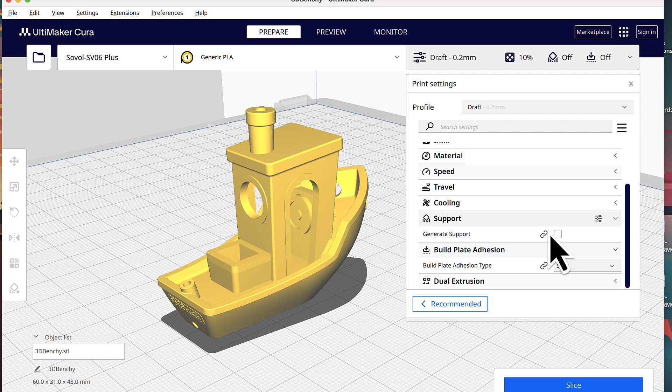But we want to take a look at the build plate adhesion. By default it's set at skirt, and for most things that's all you'll need. That or brim. Brim is good for adding additional adhesion and making sure nothing tilts over if it's not as rigid as having a flat base, or maybe multiple tubes come up just like the stack here that then connect to a piece that hover. A brim would be excellent.

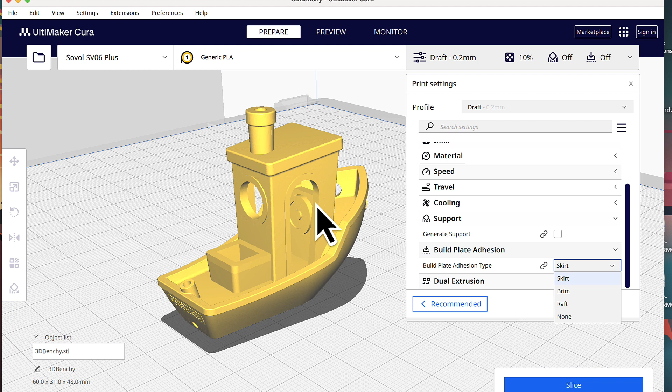But a raft, I am going to actually oppose the concept of a raft. They work, and they were the original design - that's all you had - but they are a pain to pull off once you're done printing, because it's like having a whole flat block glued to the bottom of your piece, and the only way to do that is with a scalpel blade, to etch it off and cut it off, and sometimes it rips it apart. So be wary of using a raft. Skirts and brims are fine.

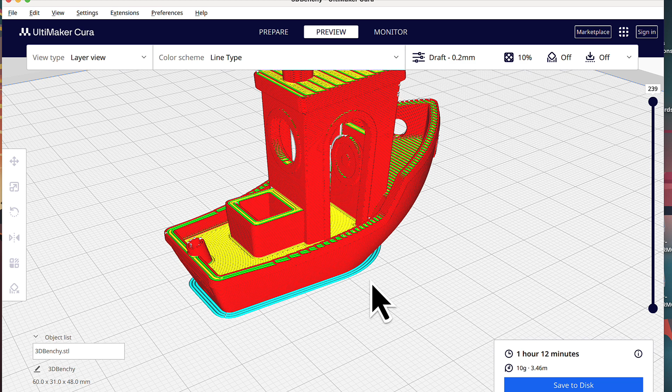So if we go ahead now, we should be good, and we click slice, and then either click preview here or up here, either one works. You'll see there is this bottom layer here in blue, which is designed simply so that the first layer - this is the skirt, the first 1 to 2 layers - stays in place. And once that's set, you're good to go.

Over on the right here, it's showing us that we're going to print a total of 239 layers. Down here it says it's going to take us an hour and 12 minutes to print, and that it's going to use 10 grams of filament. The hour and 12 minutes is an estimation. That's no guarantee - it actually might go faster or slower.

The default print speed for the Sovol SV06 Plus prints at 150 millimeters per second. The SV07 Plus and also the Bambu reach upwards to 500 millimeters per second. So yes, there are better options out there, but this is still a good option to work with.

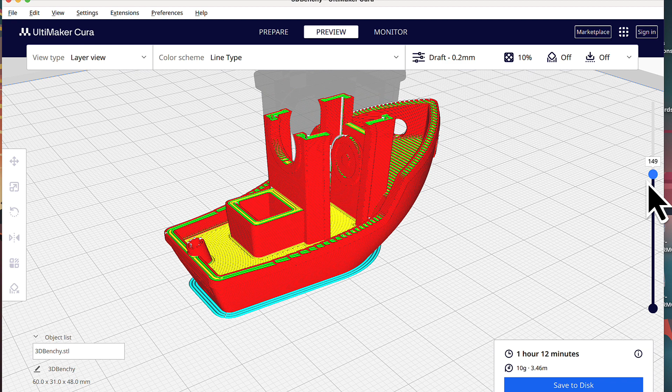So let's go ahead and slide this up and down, and what you can see is it's going to show us each and every layer as the printer prints. So this is a perfect design right here, or example. It's going to print the base, it's going to fill it in, and then it's going to create this gyroid.

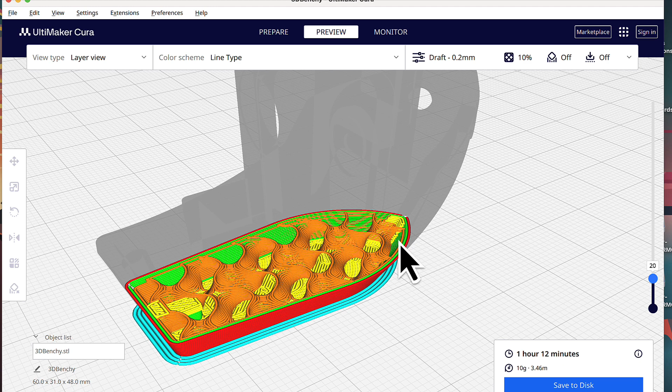I didn't show you this, and I will show you this in another video, how you can change the infill. So the infill is obviously everything within it, and you don't need a lot. This is only using, I believe, 10 or 15% infill. The rigidity is actually defined by the outer walls. So we have 2 outer walls with a light infill, and it will still be a very rigid 3D print.

Now all you have to do is click Save to Disk. For this example, we're going to do it for the SD card file format, but there are ways to do it so that it's either USB connected from the computer, which I actually recommend against, because if the computer goes down, then your print will fail.

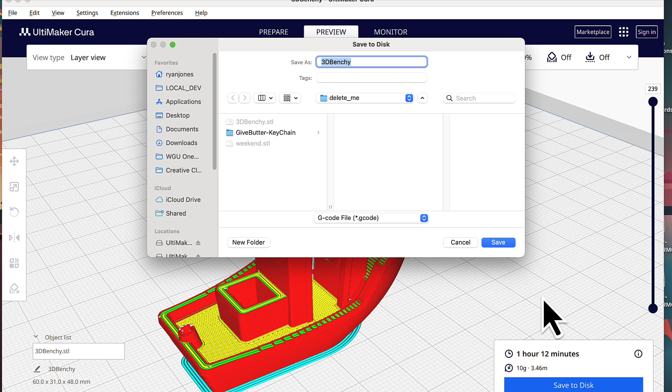The better option is to use a wireless system like an Octoprint with a Raspberry Pi microcomputer, and set up a wireless environment to your printer if it doesn't already have wireless configuration set into it. So the 2 best options are the SD card or a wireless option. For this, we're going to do SD card, so we're going to go ahead and save this.

We're going to open the folder, and then it creates a Gcode file. And a Gcode file is a standard programming language format that is designed for 3D printers and CNC machines.

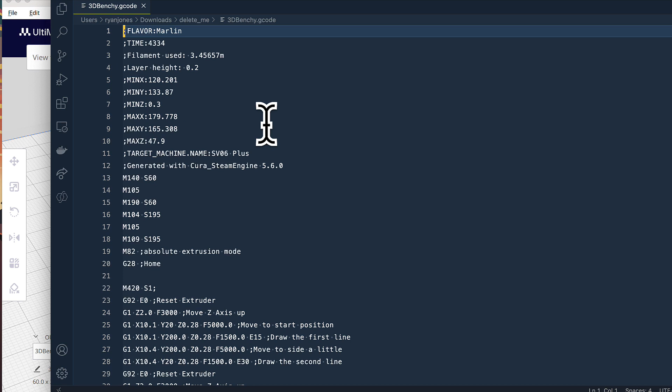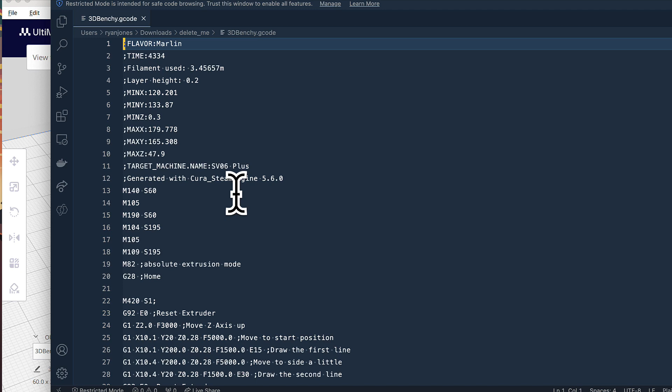So if we drag this down into a program like VS Code, we can actually see what it looks like when it outputs it. So it's going to tell the machine how to respond when it first starts up, how to move the head around, how to heat the bed, what's going on with it, where to place the home position, and then it's going to give it positions where it should actually put out the filament, how to heat it, and everything inside and out.

And that's the basics of setting up a 3D print and sending it to the printer. You just have to wait for it to finish.